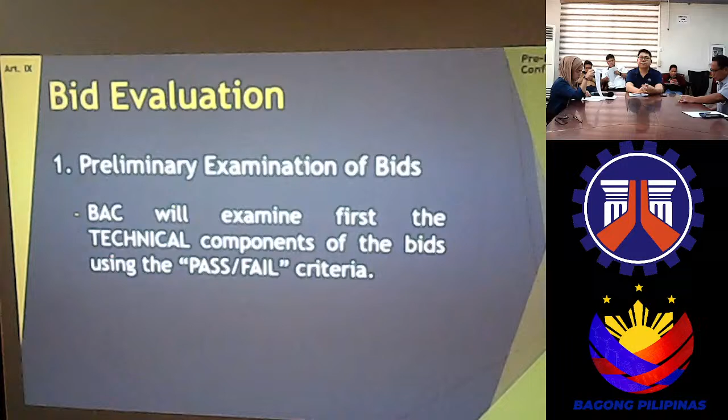Ceiling for bid prices: the ABC shall be the upper limit or ceiling for bid prices. There shall be no lower limit to the amount of the award.

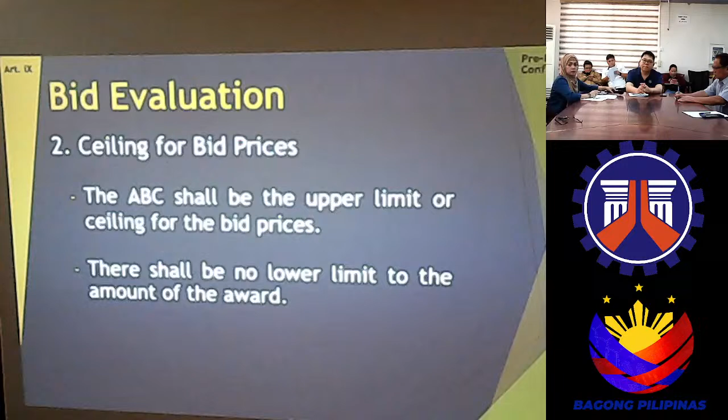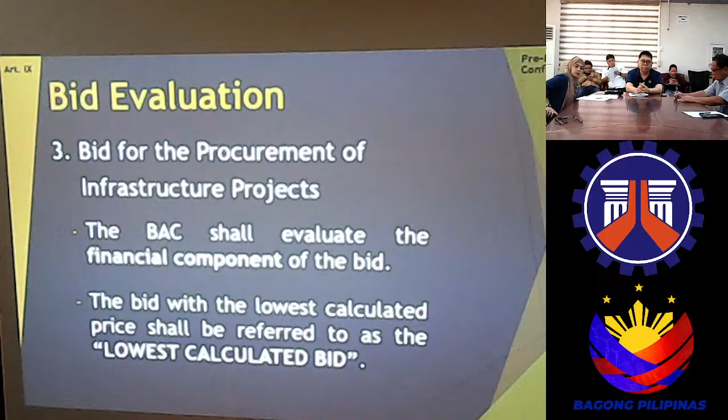Bid for the procurement of infrastructure projects: the BAC shall evaluate the financial component of the bid. The bid with the lowest calculated price shall be referred to as the lowest calculated bid.

Post-qualification. Objective and process of post-qualification: this is the stage where the bidder with the lowest calculated bid undergoes verification and validation as to whether he has passed all the requirements and conditions specified in the bidding documents.

If the bidder with the LCB passes all the criteria for post-qualification, his bid shall be considered the lowest calculated responsive bid. In all cases, the contract shall be awarded only to the bidder with the LCRB.

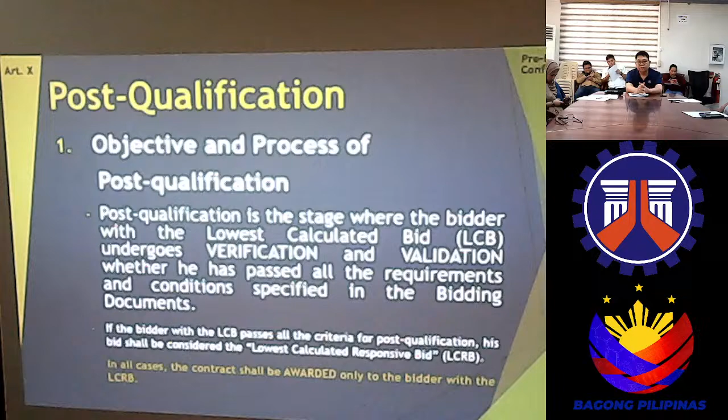Failure of bidding: there should be a failure of bidding if no bids are received, no bid qualifies as LCRB, or whenever the bidder with the LCRB refuses without justifiable cause to accept the award of contract, as the case may be.

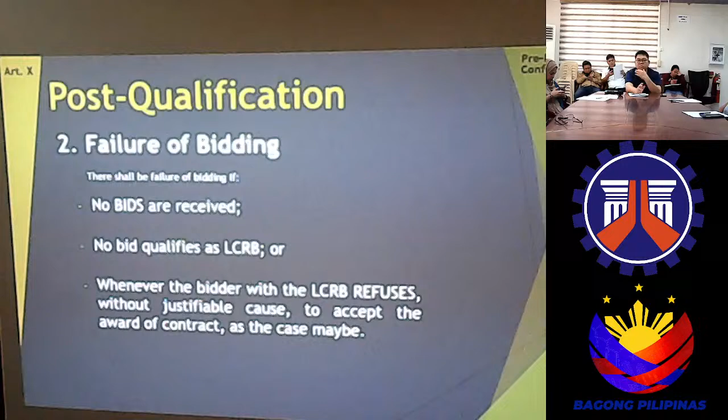Single calculated responsive bid submission: if after advertisement only one prospective bidder submits or applies for eligibility check and meets the eligibility requirements or criteria, after which it submits a bid which is found to be responsive to the bidding requirements. If after the advertisement more than one prospective bidder applies for eligibility check, but only one bidder meets the eligibility requirement or criteria, after which it submits a bid which is found to be responsive to the bidding requirements.

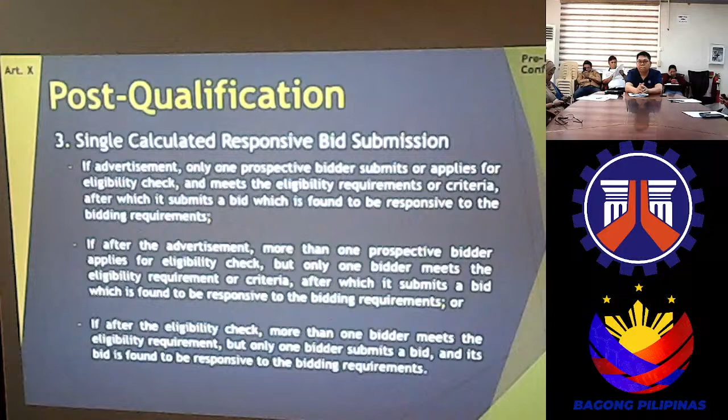Or, if after the eligibility check, more than one bidder meets the eligibility requirement, but only one bidder submits a bid and its bid is found to be responsive to the bidding requirements.

Award, notice and execution of award: within a period not exceeding 15 calendar days from the determination and declaration by the BAC of the LCRB and the recommendation of the award, the HOPE or his duly authorized representative shall approve or disapprove the said recommendation. In case of approval, the HOPE or his duly authorized representative shall immediately issue the notice of award to the bidder with the lowest calculated responsive bid.

Within 10 calendar days from receipt of the NOA, the winning bidder shall formally enter into contract with the procuring entity. When further approval of a higher authority is required, the approving authority for the contract shall be given a maximum of 15 calendar days to approve or disapprove it.

The procuring entity shall issue the notice to proceed to the winning bidder not later than 7 calendar days from the date of approval of the contract by the appropriate authority. All notices called for by the terms of the contract shall be effective only at the time of receipt thereof by the contractor.

Points to remember: submit bid on or before the date and time specified in the invitation to bid. Counter-check your documents as to correctness and completeness before submission. The ABC should be the ceiling for the contract cost, and envelopes A and B should be properly separated. Thank you.

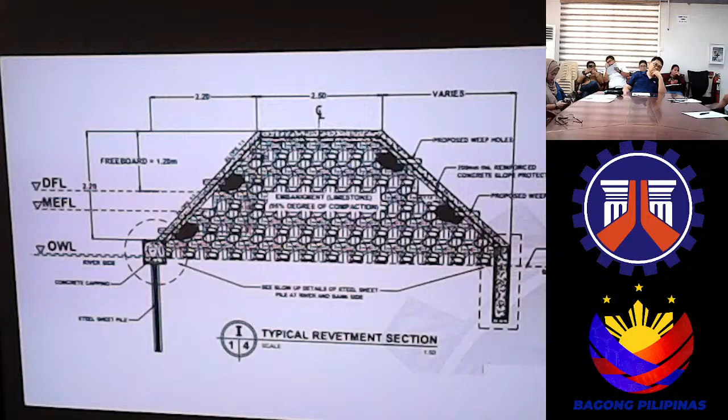For the typical revetment section, we have the back-to-back concrete slope protection, one for the bank side and river side. For the capping...

On the river side, we have the dimension of 0.5 meters by 0.5 meters, which is included in the minor structure concrete class A.

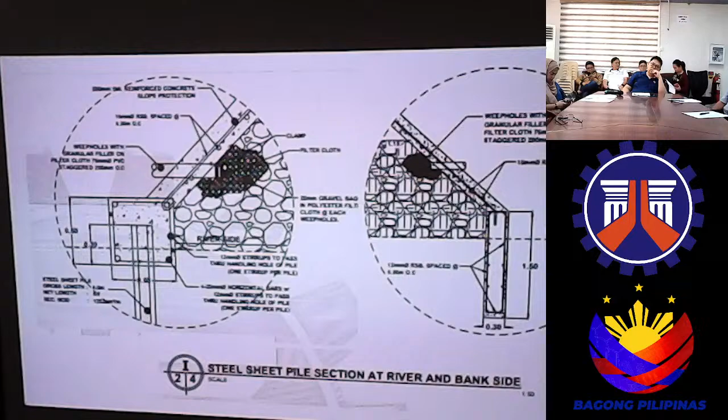And on the bank side, same thing, it's also included in the minor structure of concrete, dimension of 1.5 meter by 0.3 meters. And for the steel, it's also included in the minor structure of steel, grade 40.

We will be using the hot roll Z-type steel sheet piles with a gross length of 6 meters and net length of 5.7 meters, with a width of 770 mm and height of 343.50 mm, with a thickness of 8.6 or 8.5 mm.

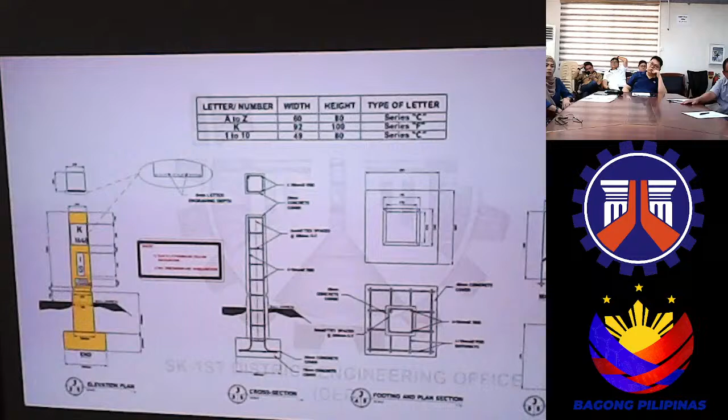This is the sample of the kilometer post at the end of the project. Only one is needed here.

For the second flood control project, construction of flood control structure along Ala River, Purok Mabuhay, Barangay Bambad, Isulan, Sultan Kudarat. Station limits 0+00 to 0+300. Net length is 300 linear meters.

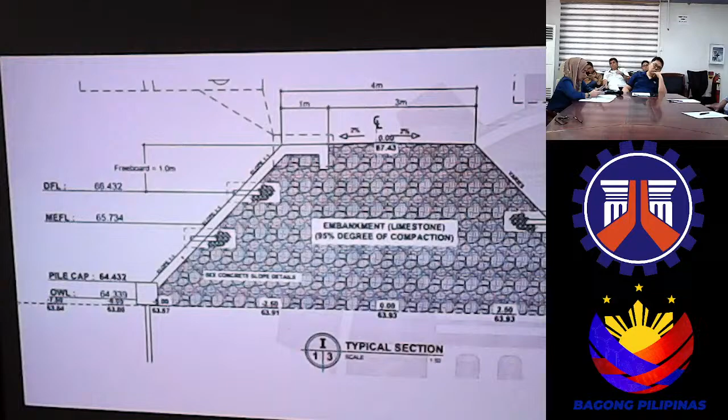For the concrete slope, only one side for now, and the crest width is 4 meters. Embankment for both projects is limestone.

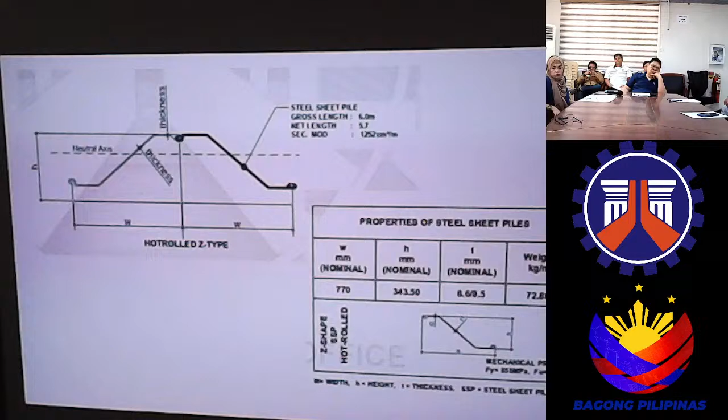This project will also be using hot rolled Z-type steel sheet piles with gross length of 6 meters, net length of 5.7, width of 770 mm, height of 343.5 mm, and thickness of 8.6 and 8.5 mm.

For the concrete slope section details, steel, still 3 meters for the width and height, and the crest width is 4 meters.

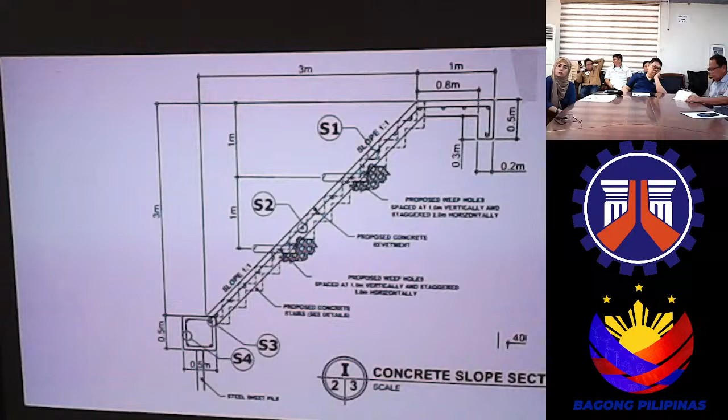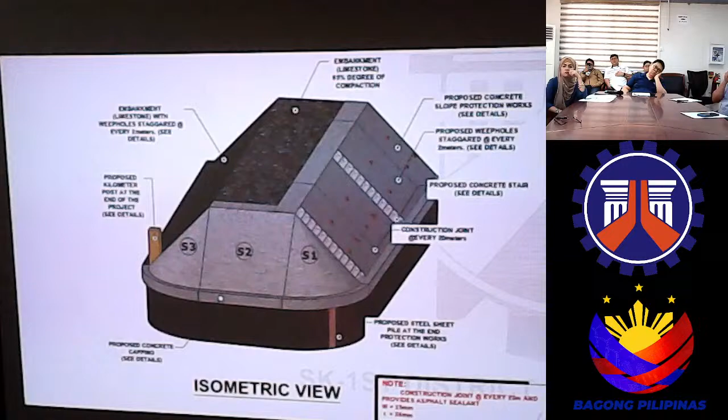And this is the end protection isometric view for the Purok Mabuhay project. That's all, thank you.

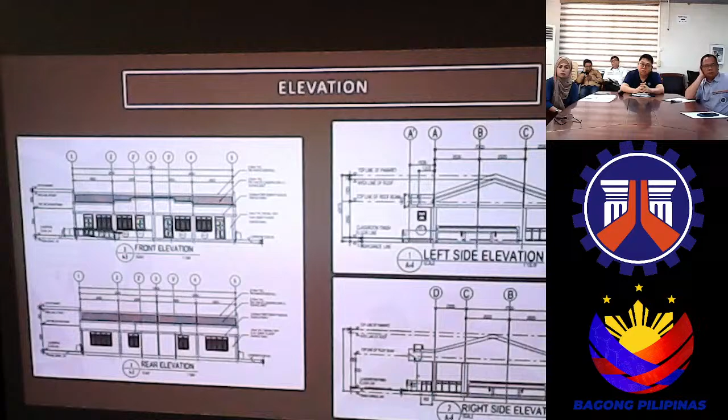This will be the perspective, for the floor, roof, and ceiling plan, and the elevation of the project: front elevation, rear elevation, left side elevation, right side elevation.

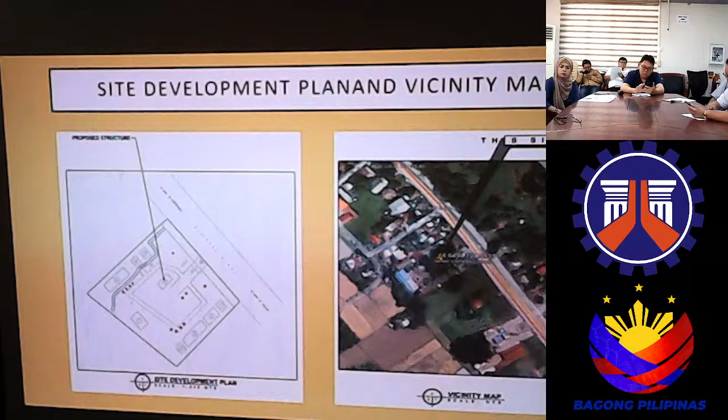For the summary of quantities, we have Part 1, facilities for the engineer: provision of field office for the engineer on rental basis. For Part 2, other general requirements: project billboard and signboard, occupational safety and health, permits and clearances.

For Part 3, civil, mechanical, electrical, and sanitary plumbing works. For Part A, earthworks: removal of structure and obstructions, structure excavation, embankment from structure excavation, embankment from borrow, gravel fill.

For Part B, we have plain and reinforced concrete works: structural concrete for footing, tie beam, column, suspended slab, girder, and beam class A, 4,000 PSI at 28 days. For structural concrete for slab on fill, class A, 2,500 PSI at 28 days.

Reinforcing steel, grade 40 and 60. Forms and false works. For the finishing...

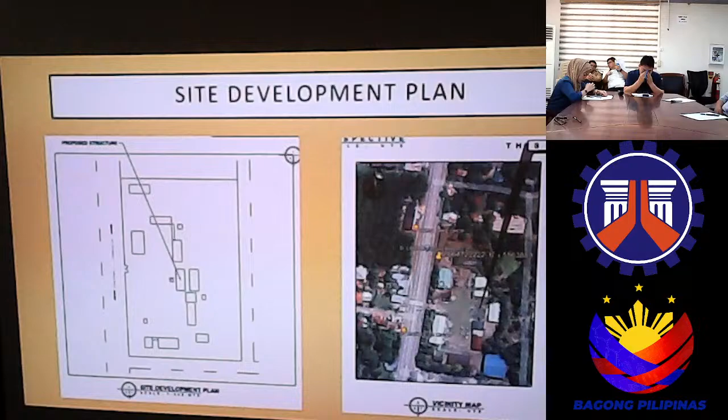For the summary of quantities, for the facilities for the engineer, we have provision of field office for the engineer, rental basis, other general requirements, project billboard, signboard, occupational safety and health, permits and clearances.

For part 2, we have civil, mechanical, electrical, and sanitary plumbing works. For earthworks, we have removal of structure and obstructions, structure excavation, embankment from structure excavation, embankment from borrow, gravel fill.

For plain and reinforced concrete works, we have structural concrete for footing tie beam, column, suspended slab, girder beam, Class A 4,000 PSI at 28 days. Structural concrete for slab on fill, Class A 2,500 PSI at 28 days.

We have reinforcing steel, grade 40 and 60, forms and falsework.

For the masonry works, we have 100 mm CHB non-load bearing wall, including reinforcing steel, 150 mm CHB non-load bearing wall, including reinforcing steel. For fabricated materials, we have jalousie window, glass, wooden doors, window accessories, window grills, finishing hardware, lock sets, carpentry and joinery works, we have blackboard and hardwood.

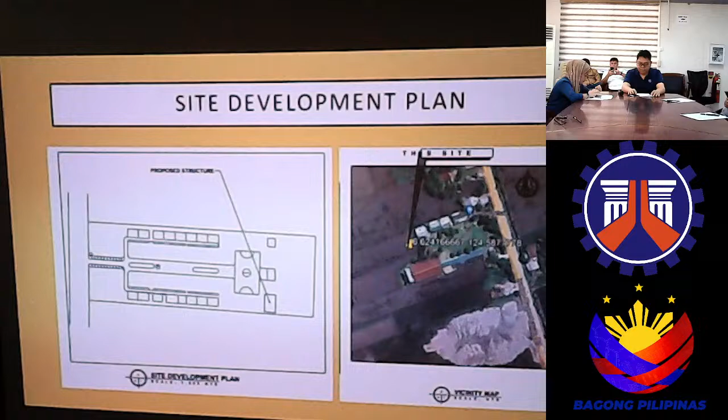For the site development plan of the project and vicinity map. Summary of quantities, we have facilities for the engineers, provision of field office for the engineer, rental basis. Part 2, other general requirements, we have project billboard, signboard, occupational safety and health, permits and clearances.

For Part 3, civil, mechanical, electrical, and sanitary plumbing works. For earthworks, we have removal of structure and obstructions, structure excavation, embankment from structure excavation, embankment from borrow, gravel fill.

For plain and reinforced concrete works, we have structural concrete for footing tie beam, column, suspended slab, girder beam, Class A 4,000 PSI at 28 days. We have structural concrete for slab on fill, Class A 2,500 PSI at 28 days. Reinforcing steel, grade 40 and 60, forms and falsework.

For masonry works, we have 100 mm CHB non-load bearing wall, including reinforcing steel, 150 mm CHB non-load bearing wall, including reinforcing steel. Fabricated materials, we have jalousie window, glass, wooden doors, window accessories or window grills, finishing hardware, lock sets, carpentry and joinery works, blackboard and hardwood.

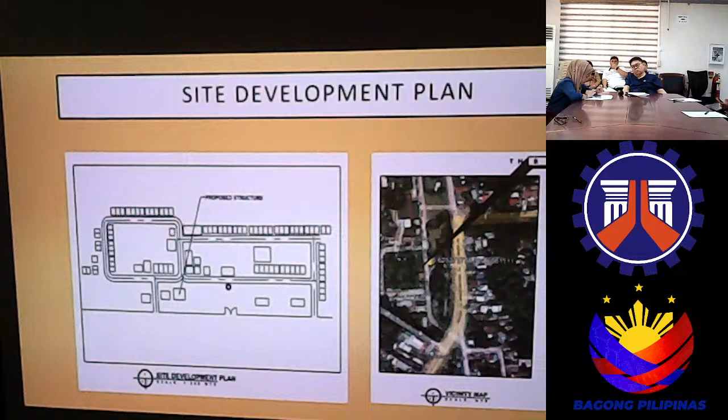For the construction of one-story, two-classroom school building in Calawag Central Elementary School, Barangay Calawag 2, Isulan, Sultan Kudarat. This will be the site development plan and the vicinity map.

For the summary of quantities, Part 1: facilities for the engineer, provision of field office for the engineer, rental basis. Part 2: other general requirements, project billboard, signboard, occupational safety and health, permits and clearances.

For Part 3, civil, mechanical, electrical, and sanitary plumbing works. Earthworks: removal of structure and obstructions, structure excavation, embankment from structure excavation, embankment from borrow, gravel fill.

Plain and reinforced concrete works: structural concrete for footing, footing tie beam, column, suspended slab or girder and beam, Class A, 4,000 PSI at 28 days. Structural concrete for slab on fill, Class A, 2,500 PSI at 28 days.

Reinforcing steel: grade 40 and grade 60. Forms and falseworks. For masonry works: 100 mm CHB non-load bearing wall including reinforcing steel, 150 mm CHB non-load bearing wall including reinforcing steel.

Fabricated materials: jalousie window glass, wooden doors, window accessories, window grills, finishing hardwares, lock sets, carpentry and joinery works, blackboard, airwell. For finishing works: precast concrete molding, plain cement plaster finish, railings, handrails, fiber cement board ceiling on metal frame, reflective insulation, cement-based waterproofing.

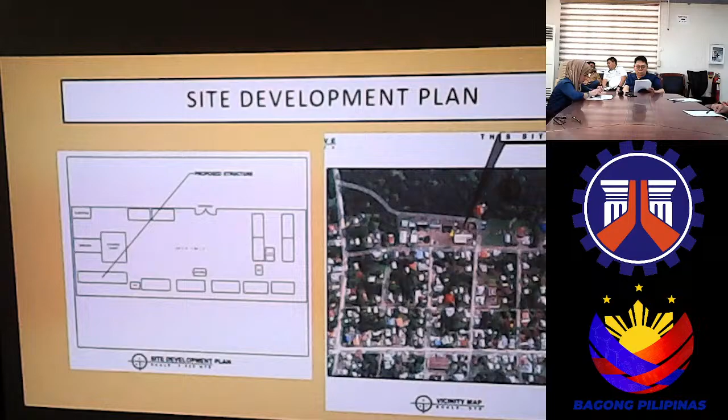Summary of quantities for Part 1: facilities for the engineer, provision of field office for the engineer, rental basis. Other general requirements: project billboard, signboard, occupational safety and health, permits and clearances. For Part 3: civil, mechanical, electrical, and sanitary plumbing works.

Part A, earthworks: removal of structure and obstructions, structure excavation, embankment from structure excavation, embankment from borrow, and gravel fill. For Part B, plain and reinforced concrete works: structural concrete for footing, footing tie beam, columns, suspended slab, girder, or beam, Class A, 4,000 PSI at 28 days.

Structural concrete for slab on fill, Class A, 2,500 PSI at 28 days. Reinforcing steel: grade 40 and grade 60. Forms and falseworks. For finishing, we have masonry works.

We have 100 mm CHB non-load bearing wall including reinforcing steel, 150 mm CHB non-load bearing wall including reinforcing steel. Fabricated materials with jalousie window glass, wooden doors, window accessories, window grills, finishing hardwares, lock sets, carpentry and joinery works,